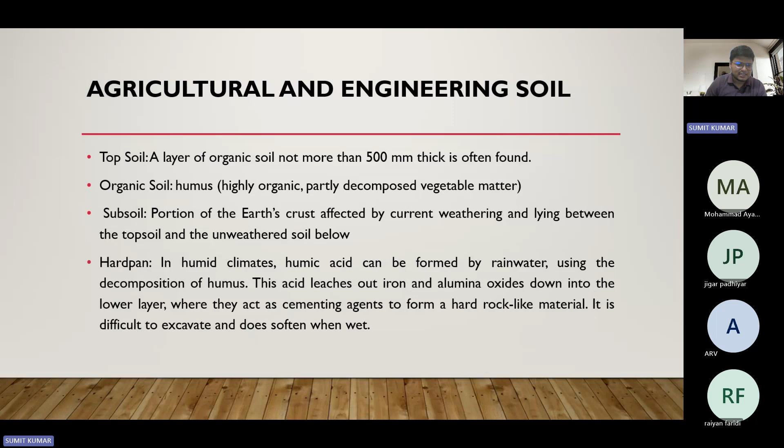Soil is basically a building block also, because the bricks used in construction also contain soil. It has been used across all construction practices.

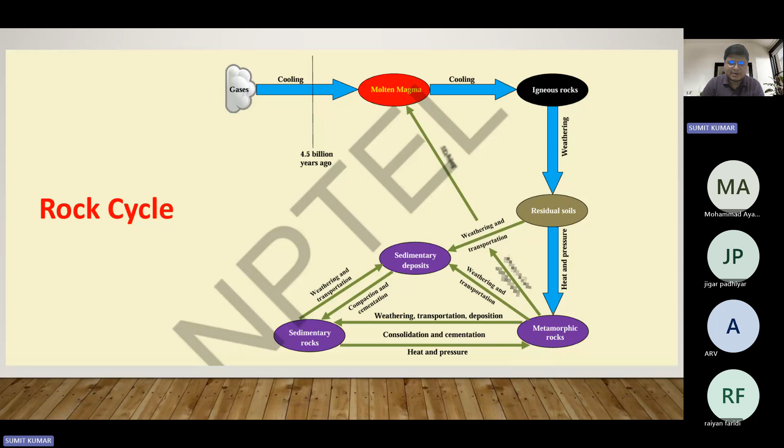We discussed the soil horizons and soil characteristics. We understood how the formation of soil takes place, and how geologists classify the earth crust as rock, whether hard or soft deposit. Afterwards we understood the rock cycle, covering igneous, residual, metamorphic, and sedimentary rock. Those contents were discussed in detail in the previous classes.

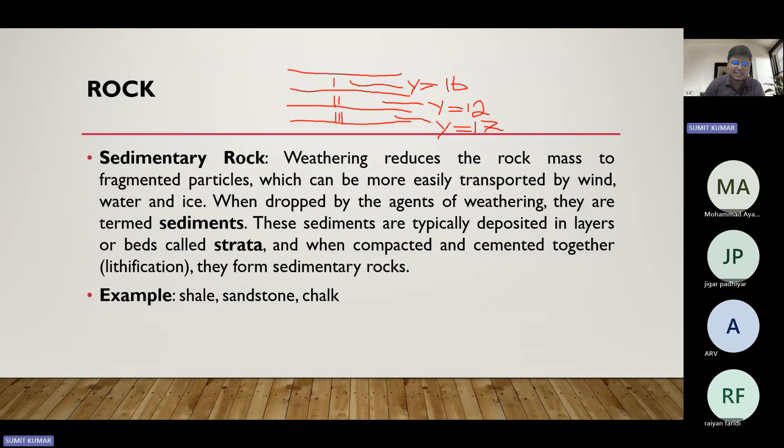I think you have that content, and the assignment problem came in this class. Examples of igneous rock are granite, gabbro, and basalt - their characteristics and how the rock gets formed, the stratified structure, and what strata means was discussed. In the figure, I gave an example about strata showing different characteristics in different layers of soil.

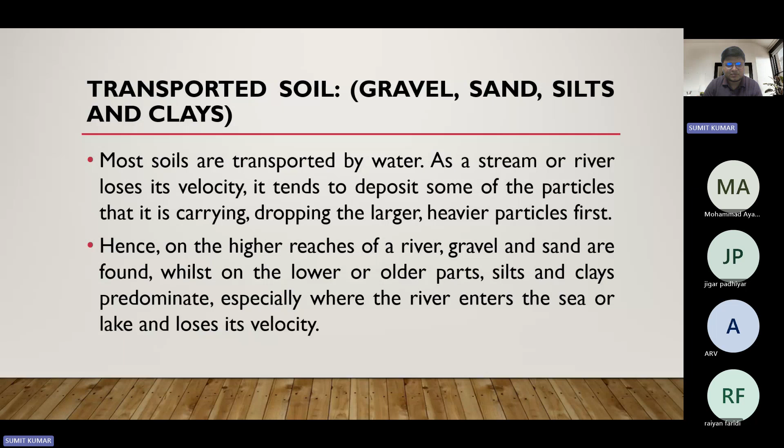We discussed how when water carries heavier rock material, like a river does, the heavier part of the soil gets deposited at the upstream side while the lighter part carries forward - that's why gravels are found in the upstream section. That was also elaborated.

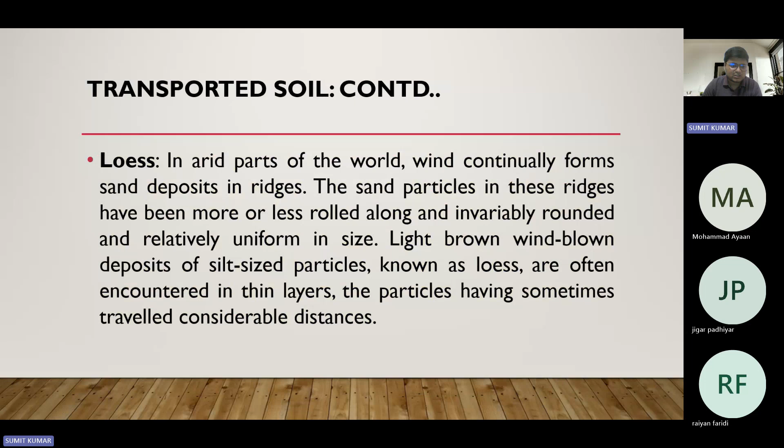Then residual soil - the deposit which resides on the parent rock only, where formation takes place over there, is residual soil. Then we discussed laterites, which are formed by the chemical weathering process.

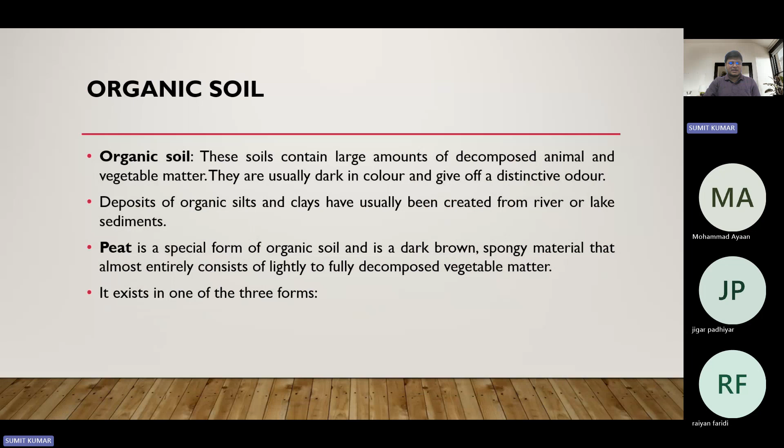At the end, organic soil like peat - the formation of organic soil through decomposition of organic matter like animal, plant, and vegetative matter - was covered. Subsequently, different organic soil components like peat, fibrous, pseudo-fibrous, and amorphous were elaborated.

Subsequently we discussed characteristics like cohesion and angle of internal friction, the two shear strength parameters which govern the characteristics of soil.

Then the difference between soil properties and other structural properties like steel and concrete was formed. With steel and concrete, we manufacture them so we have control over that, but soil is formed through a natural process, so the control is not in our hand - it is by nature only.

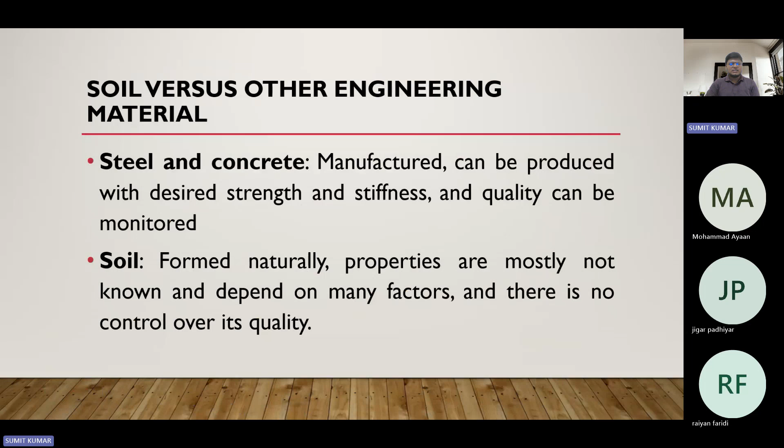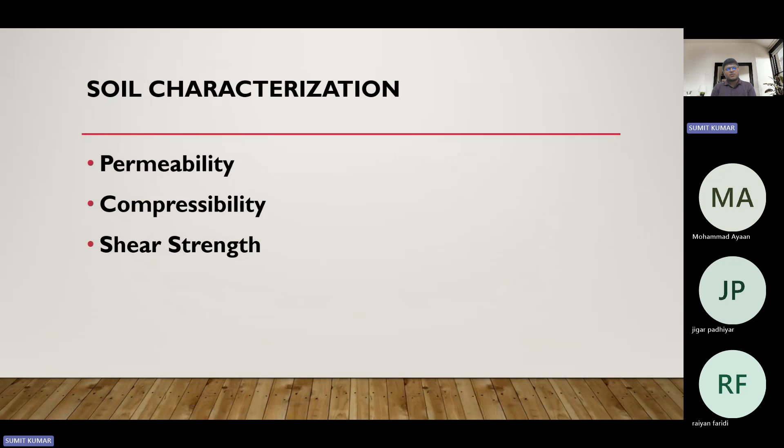Permeability, compressibility, and shear strength are some soil characterizations which we haven't elaborated on in the previous class. From today, we will discuss some properties of permeability, and compressibility and shear strength will be discussed in subsequent classes.

How we identify soil in the field - whether it is sand, silt, or clay - was elaborated in tabular form. And sieve analysis, one of the important factors for soil classification, was covered in the previous classes.

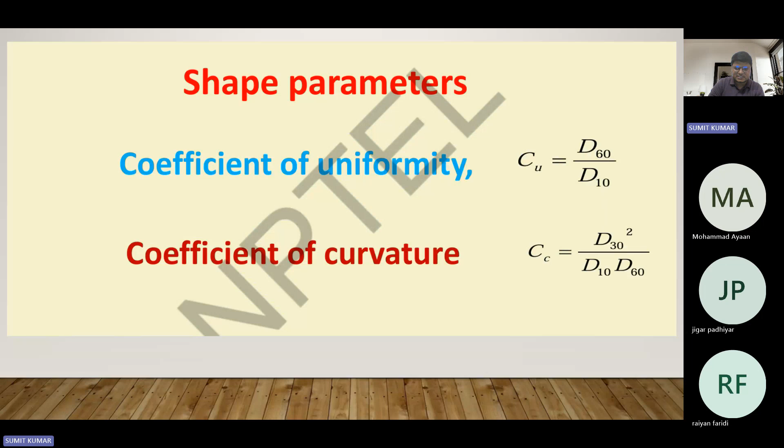Subsequently we saw the grain size distribution graph, from which we found the coefficient of uniformity and coefficient of curvature. Then we covered various Atterberg limits like the liquid limit, plastic limit, and shrinkage limit.

At the end, we saw a graph where we learned that soil first replaces air void with water void until the shrinkage limit. Once the shrinkage limit is reached, the soil is in a fully saturated condition.

Afterwards, when water gets added, the volume increases. In addition, we have understood that up to the shrinkage limit, it is in solid form. Subsequently, when the water content increases, it converts into semi-solid. Between the plastic limit and liquid limit, it is in plastic solid form. After the liquid limit, if water remains added, it converts into a viscous liquid.

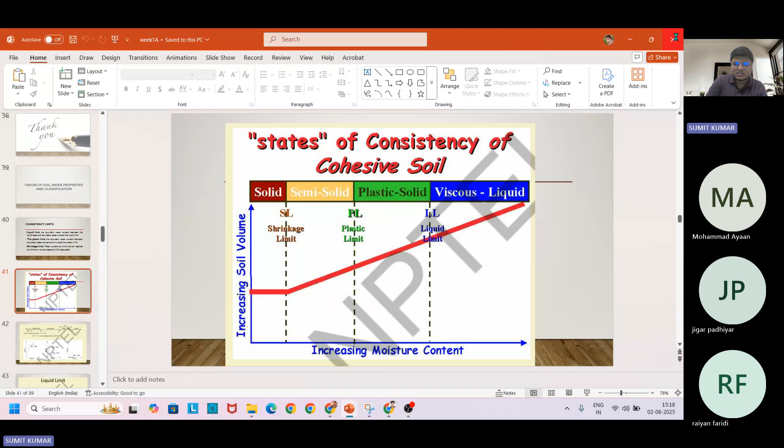Okay, so up to this we have discussed. Afterwards, some problems regarding the same have been covered in the previous class. So now I think we can move with the new content and cover the new discussions pointed out for today. Let me start today's class with the new content.

First of all, we are going to study the three-phase system, the three-phase diagram. So let's understand the basic consideration. If we talk about soil, soil looks like it is in solid form only.

If we ask a layman, a layman is a person who has no technical knowledge. Everyone has some knowledge, maybe more than us, but when we talk about no knowledge, we mean technical knowledge. They are not technical persons who understand technical terms. If you go to some places, laborers or maybe a Rajmistri might sometimes have more knowledge than professional engineers who have worked for many years.

But when we talk in technical terms, they are unable to answer. So we are the technical people. When we talk about the three-phase diagram, if we ask any person with technical understanding, we say we stand on this soil. What are the characteristics of this? Whether it is solid or liquid.

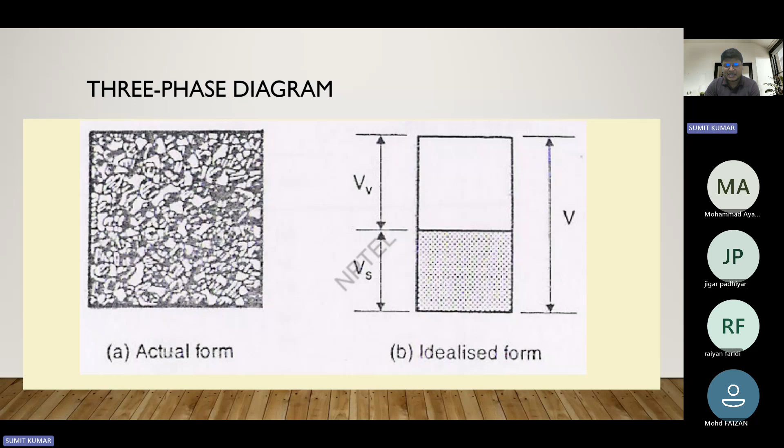Okay, over here the term void comes. So what is void? Void is the empty space in the soil volume that might be filled with water or air. A term is also explained for this, named the void ratio. Void ratio is nothing but the volume of void to the volume of solid, and its range lies from 0 to infinity.

Now there is a question: how? Okay, now let me draw one picture.

Now you see over here, there is this phase system in which we have solid and void. There might be a condition where there are no voids, only solid. If we consider this cross section only, then it is solid only. The void ratio in this volume would then have no void, volume of void we have kept upside. So there might be a condition in which no void is present. Practically it's not possible, but theoretically there may be a chance of no void. The void ratio is the volume of void by volume of solid, so since there is no volume of void, the void ratio may be 0.

Subsequently, if some void is present, then the void ratio, which is volume of void by volume of solid, becomes greater than 0 when some volume of void is there. So its value lies in the range from 0 to infinity.

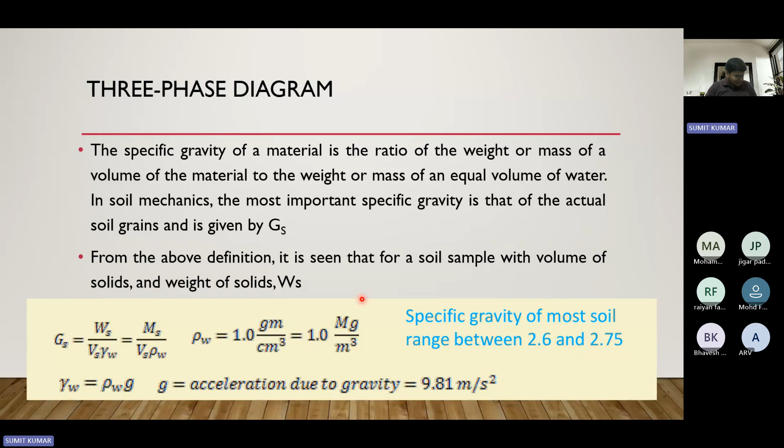And this value is 1 gram per cc, that is the density of water. When we talk about gamma W, that is the specific weight or density of water, represented by rho into G, where G is the acceleration due to gravity. We have also seen in the last class that the specific gravity of most normal soils lies in the range of 2.6 to 2.75, but for organic soils its value is sometimes found to be less as well. We will see more in that regard as we move forward.

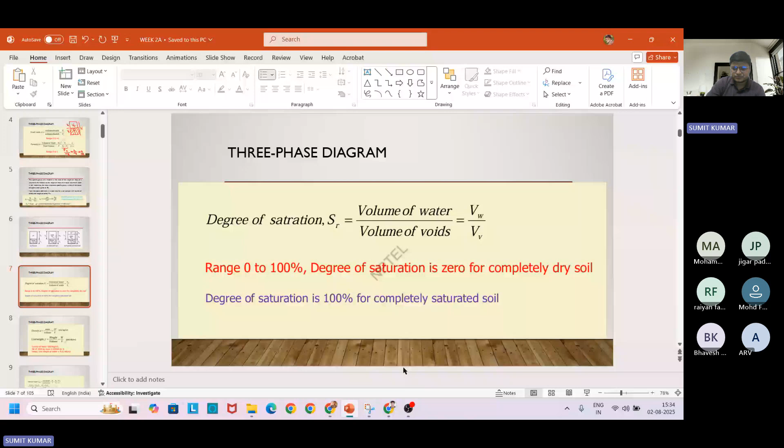Okay, so I think up to this there will be no confusion in anyone's mind. So we will move ahead. Now we move to the density. We already read weight density, that is rho into g. Over here, density is defined; density is nothing but mass per unit volume.

Now let me explain this. This thing is already known to you. No need for explanation, but just for the sake of convenience, I will explain this. This is a solid which might have a mass of m, and its volume is equal to v. If any solid or anything is present, it must have some mass and some volume, because whether it is solid, liquid, anything, it must have some mass and must occupy some volume.

So its mass divided by its volume is known as mass density, and the unit of mass is kg, gram, whatever you say, while the unit of volume is meter cube, liter, centimeter cube. So its unit becomes kg per meter cube, or maybe gram per centimeter cube, whatever is feasible, whatever CGS unit, MKS unit, SI unit you want to assume.

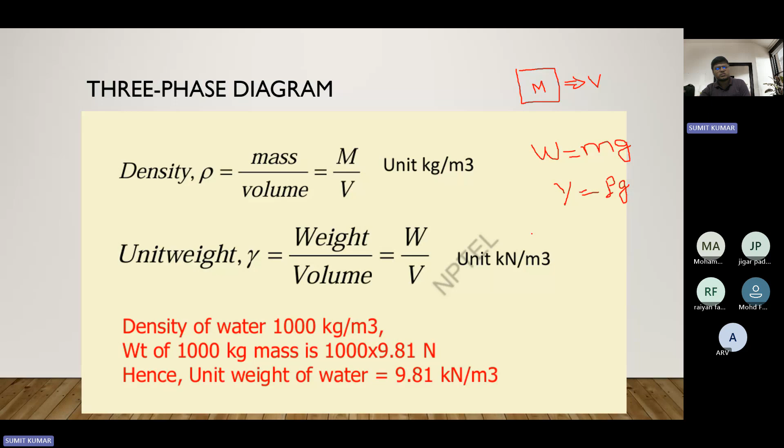So the density of water is 1000 kg per meter cube, while the weight of 1000 kg of water is 1000 into 9.81 Newton, that is 9.81 kilonewton per meter cube is the unit weight of water. Now we move to the next term, the bulk unit weight. The bulk unit weight is the weight in the given condition divided by the volume in the given condition, that is W by V.

If we talk in terms of the phase diagram, Ws is the weight of solid, Ww is the weight of water, divided by the volume of solid plus volume of void. In the three-phase diagram, you see that solid is there, water is there, and air is there. Solid has some weight, water has some weight, but air has negligible weight, so we assume weight of air as 0. So the total weight is weight of solid plus weight of water.

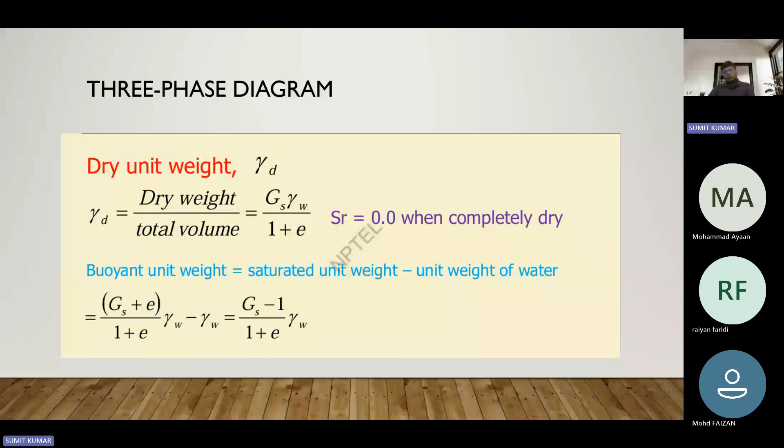Now, when we move ahead, we see the relation between W, gamma D and gamma bulk. The gamma bulk is weight of water plus weight of solid divided by volume, while in the dry condition there is only weight of solid because there is no water, so weight of solid divided by total volume. Water content W equals WW upon WS, so weight of water equals water content into Ws. So gamma bulk becomes Ws by V into 1 plus W, and gamma D becomes gamma bulk by 1 plus W.

Now we see the relation between W, GS and SR. Water content is weight of water by weight of solid. Weight of water is volume of water into gamma W, and weight of solid is volume of solid into gamma W into GS. Gamma W gets cancelled, so it becomes volume of water by volume of solid into G, and void ratio is volume of void by volume of solid. So it gets converted into SR into E upon GS.

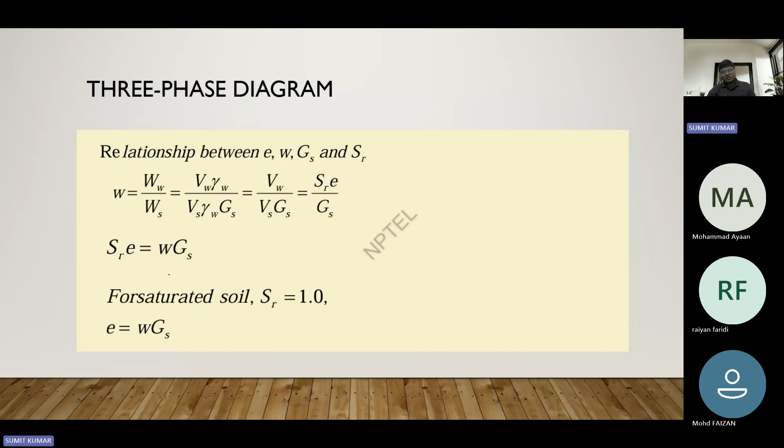Up to that we have read the degree of saturation, but there is also a term Na. There is another term AC, the air content, that is volume of air by volume of void, as degree of saturation is volume of water by volume of void. So AC plus S is equal to 1. Similarly, the percentage air voids term Na is volume of air by total volume, where volume equals volume of solid plus volume of water plus volume of air.

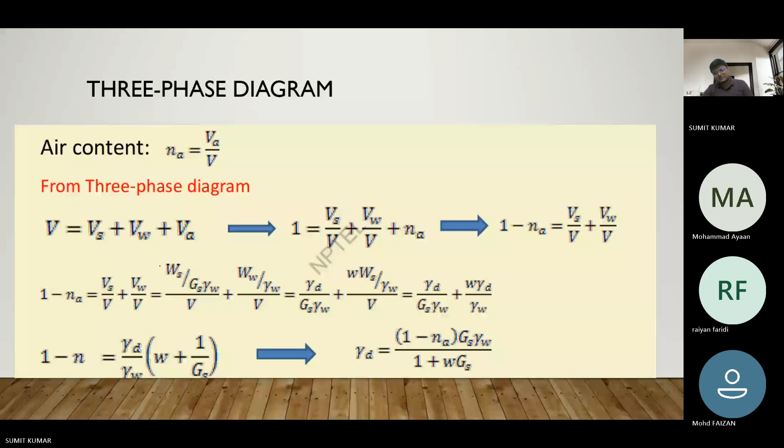When we solve it in the same fashion, we find that gamma D is also given as 1 minus Na into Gs into gamma W by 1 plus WG. So that's all for this up to here. Now we move further in the three-phase diagram with some numerical problems. At the end of the numerical problems, we are going to take a small 5-minute break so that the mind gets recovered, and then we move further.

So first of all, see this question, and I will explain it step by step. But first, all of you read it by yourself, to see what you understand from this question.

Okay, a moist soil sample weighs 346 grams. After drying at 105 degrees Celsius, it weighs 284 grams. Specific gravity of the mass and the soil solids is 1.86 and 2.7 respectively. Determine the water content, void ratio, and the degree of saturation. So the first problem is very simple. I will explain all the problems, but for similar problems like this, I suggest you take any soil mechanics book.

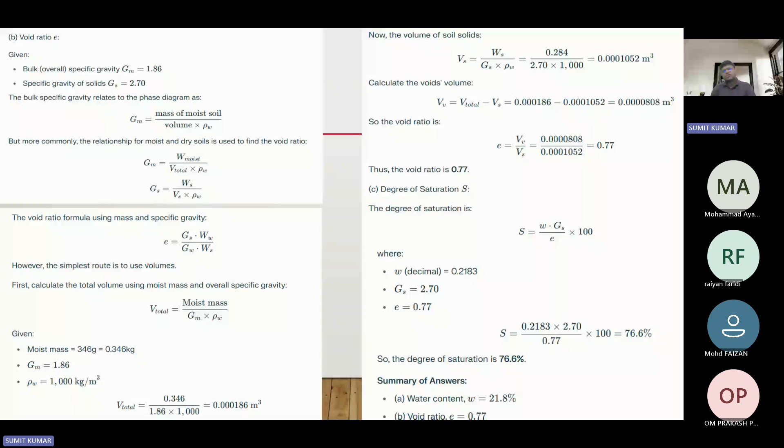And subsequently, when the void ratio is found as 0.77, the degree of saturation you can calculate easily. That is nothing but Se equal to wG. We need to calculate the S value. We already know e, that is the void ratio, and we know Gs, that is 2.7. Hence the degree of saturation comes out to be 76%. And the summary of the answer is also printed over here.

Now move to the second problem associated with this topic. A soil deposit is being considered to fill a building site. In its original state in the borrow pit, the void ratio is 0.95. Based on the laboratory test, the desired void ratio in its compacted state at the building site is to be not greater than 0.65. Determine the percentage decrease of the volume of the deposit from its original state. So, two important equations you need. What are those two equations?

One thing is that the volume of solid and weight of solid remain constant. If you take any soil, its solid content and weight of solid content never change. This is the most important thing you need to understand. Constant. Now, another relation is also there. That relation says Vs, the volume of solid, equal to Vt, this is equal to.

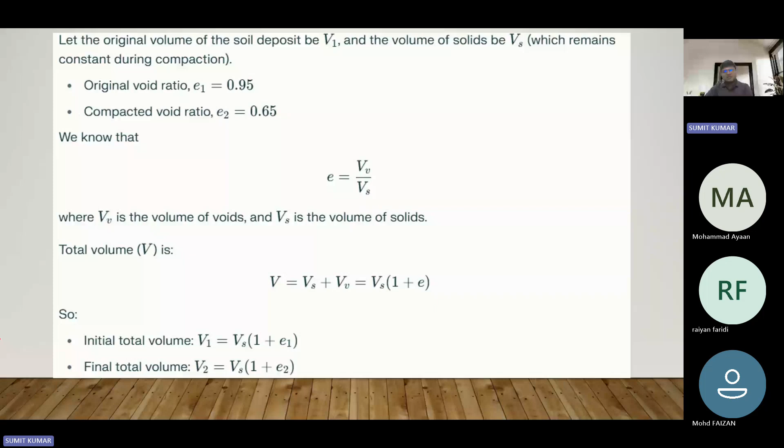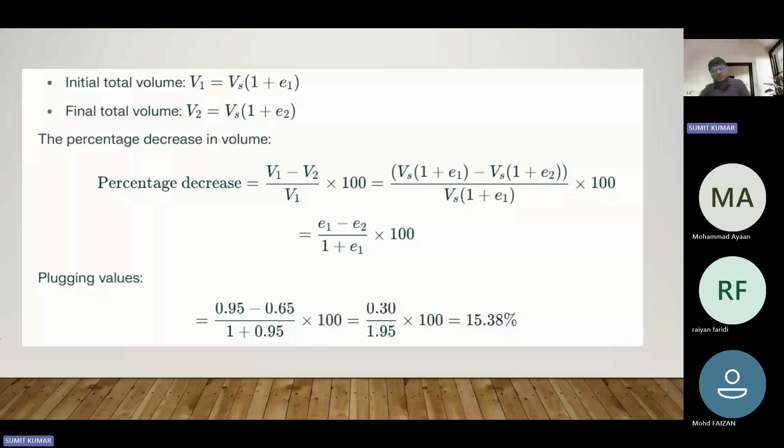As I have already said, Vs equal to Vt by 1 plus E. Here V1 is the total volume, so V1 equal to Vs into 1 plus E1, while V2 equal to Vs into 1 plus E2. Subsequently, when we calculate the percentage decrease as V1 minus V2 by V1 into 100, you find that it is E1 minus E2 by 1 plus E1 into 100, and this percentage comes to be 15.38%, and hence our problem gets solved.

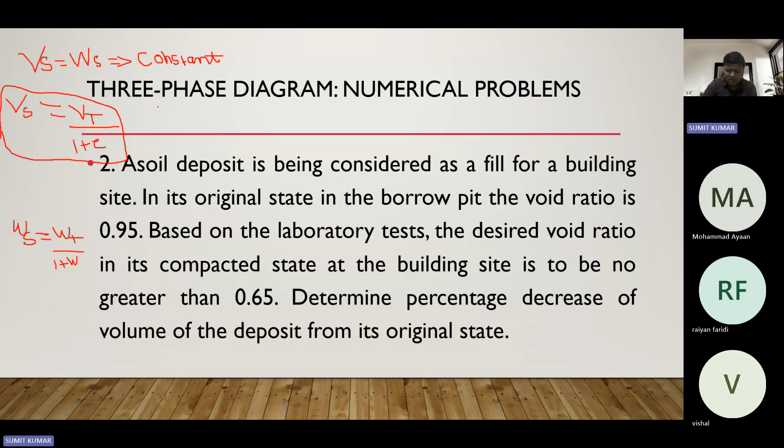Again, what relations are we going to use? We are going to use this relation only, which we have written in the previous slide. That is Vs equal to Vt by 1 plus E. This relation we are going to use, where Vs is the volume of solid, Vt is the total volume, and E is the void ratio. The void ratio is given to us. Now let's read the question.

Here the soil sample taken from the borrow pit has the in situ void ratio of 1.15. The soil is to be used for the compaction project where the total volume is 100,000 meter cube, and over there the void ratio is 0.73. So how are we going to solve it?

First of all, the soil is to be used for a compaction project where a total of this many meter cube is needed in a compacted state with the void ratio predetermined to be 0.73. So 100,000 divided by 1.73 equal to Vs, and that Vs is equal to Vt by 1 plus 1.15.

So I have said this, but maybe you haven't understood, so let's see the solutions. They have solved it in a similar fashion. Over here, given terms are E naught equal to 1.15, E1 equal to 0.73.

The volume needed at the compaction site is 100,000 meter cube. The volume to be excavated from the borrow pit is taken as V naught. Now, the total volume V is related to Vs, as I already said, Vs remains constant. So V equal to Vs into 1 plus E. Over here, V naught equal to Vs into 1 plus E naught, where V naught is the unknown, and V1 equal to Vs into 1 plus E1, where E1 is known to us, that is 0.73.

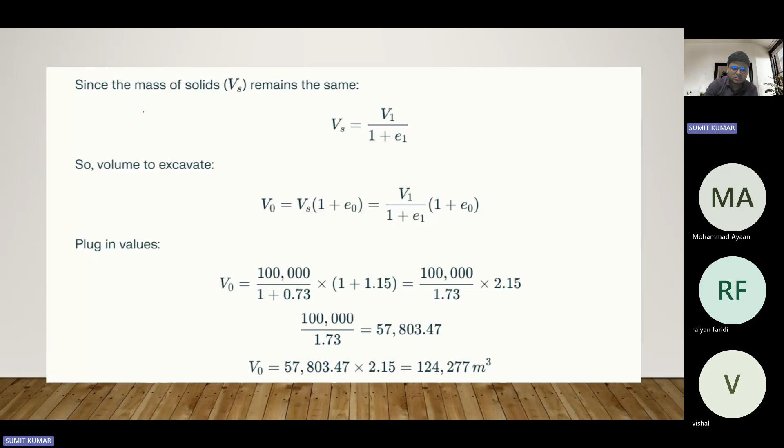So from the last two equations, using E1 value as 0.73 and V1 value as 100,000, we are able to find Vs. Once we find Vs, we put it in the above equation, and E naught is already known as 1.15, so we are able to find the volume V naught. So that's what we have done. First we calculated Vs equal to V1 by 1 plus E1, and from that we found V naught, the unknown volume required. There might be some calculation mistake, I'm not sure, but the concept more or less everyone should have understood.

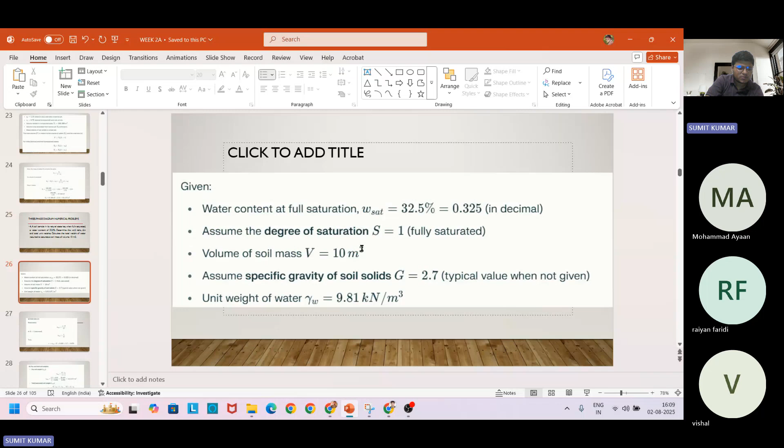Let me move to the next question. There are many problems related to the same topic. I will share the PPT with you and you could solve by yourself, or maybe I'll come to it at the end. I will solve it because I have to cover many more things. Let me discuss one more problem, then I will leave two problems for you.

Over here again the similar concept. The question is: a soil sample in its natural state, when fully saturated, has water content 32.5%. Determine the void ratio, dry and total unit weight. Calculate the total weight of water required to saturate the soil, a soil mass of volume 10 meter cube.

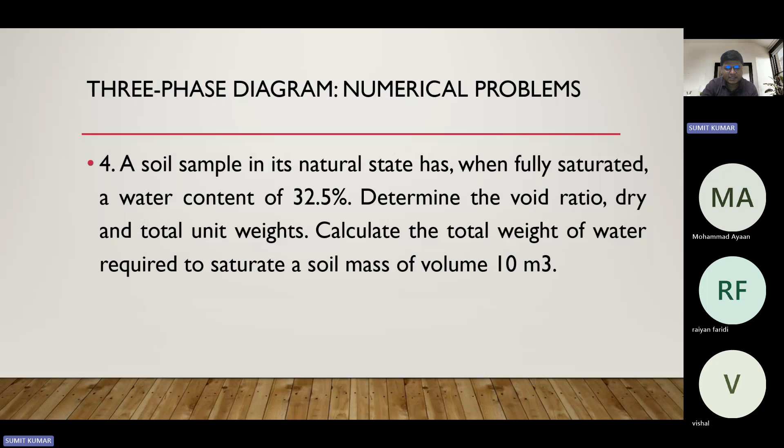So it is a simple problem. The solution I have already done over here, I will share it with you. You will easily understand because I don't think this basic thing needs to be discussed in so much detail. If required, I will discuss it in some other class, because today we have only 1 hour left and many more things to cover. So I will skip this and share the PDF.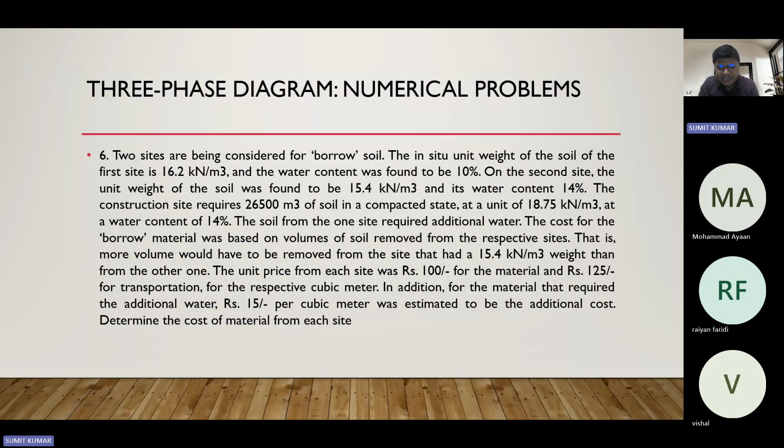So this is the homework, question number 5 and 6 you need to solve yourself. In addition, the four other problems mentioned above, you need to solve by your own hand with pen and paper so that you can easily grasp the concept. Because if someone just teaches you and discusses the problem and solutions, this is not the right way to get a better understanding of the subject. Hence, it is my sincere request that you must solve these problems by yourself.

Now I move to the next part, that is permeability and seepage. Up to this point, in the previous class we have understood the origin of soil and the three-phase diagram. Now we are moving to a new topic, permeability and seepage, because soil is permeable. When we talk about permeability, it is the ability of the soil to allow water to flow through it. So that discussion we are going to carry forward from here.

Now, first of all, when we talk about permeability, we talk about movement of water through the soil mass, so there must be water present in the soil surface. Now I start with a very basic concept: in our households we normally use hand pumps.

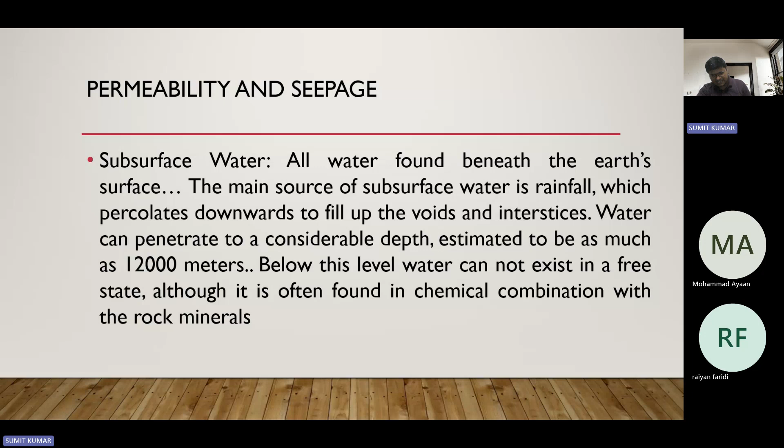Now, the subsurface can be split into distinct zones. We talk about the saturation zone, dry zone, and many more zones, which we are going to discuss here. So first of all, the subsurface can... give me a minute, please.

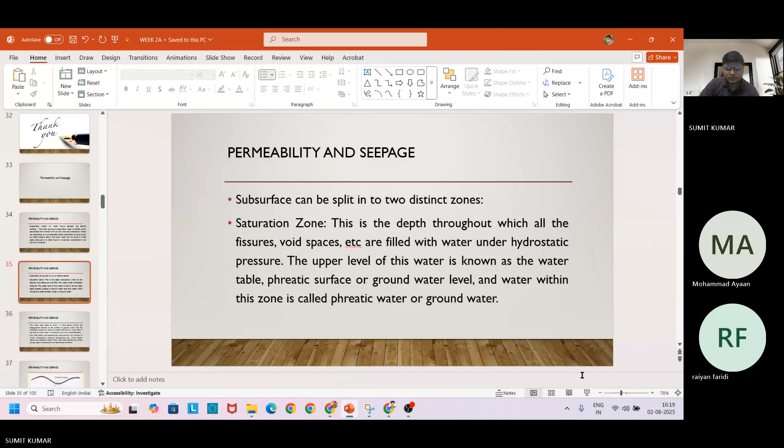Okay, so I am talking about the subsurface. The subsurface can be split into two distinct zones. First is the saturated zone. This is the depth through which all the fissures, voids, etc. are filled with water under hydrostatic pressure. The upper level of this water is known as the water table, phreatic surface, or the groundwater level. The water within this zone is called phreatic water or groundwater.

Now, the water table tends to follow in a more gentle manner the topographical features of the surface. At the groundwater level, the hydrostatic pressure is zero. So another definition of water table is the level to which water will eventually rise in an unlined borehole. The water table is not constant but rises and falls with the variation of rainfall.

As I have said earlier, specifically before the rainy season, at peak summer, the water table is found to fall below a certain level. At the same time, when the rain comes, specifically when we grow crops like rice in the kharif season, sometimes the water table is too low, so we need to irrigate the ground with boreholes or, if the facility is there, with the help of canals. So the water level fluctuates depending upon the atmospheric pressure, temperature, etc.

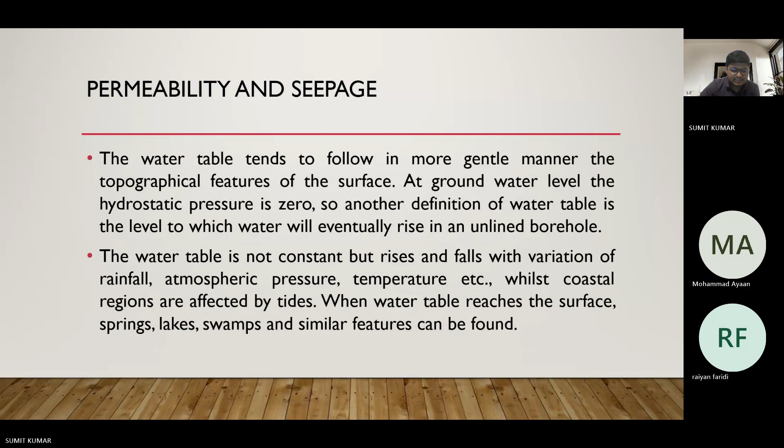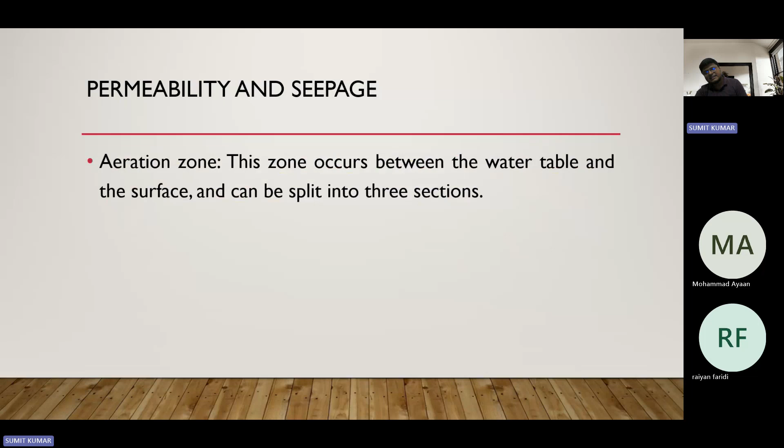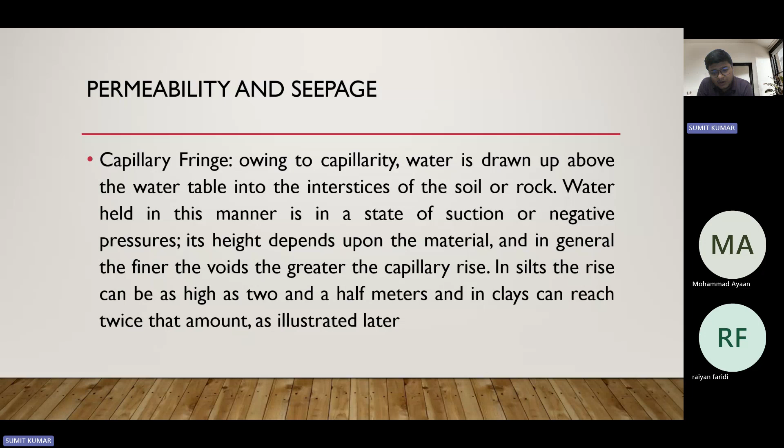Now you see the permeability. In permeability and seepage we talk about the capillary fringe. Owing to capillary action, the water is drawn up above the water table into the interstices of the soil or rock. The water held in this manner is in a state of suction or negative pressure. Its height depends upon the material, and in general, the finer the voids, the greater the capillary rise. The finer the soil particles, the more the capillary rise. In silts, the rise can be as high as 2.5 meters, and in clay it reaches twice the amount as illustrated later.

Now let's talk about the intermediate belt. Rainwater percolates down to the water table. A certain amount is held in the soil by the action of surface tension, capillarity, adsorption, chemical action, etc. The water retained in this manner is termed held water and is deep enough not to be affected by the plants.

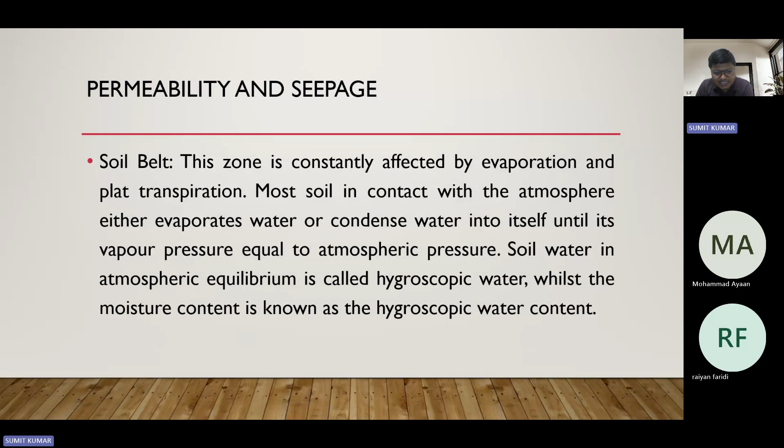Talking about the soil belt, this zone is constantly affected by evaporation and plant transpiration. The moist soil in contact with the atmosphere either evaporates water or condenses water into itself until its vapor pressure equals atmospheric pressure. The soil water in atmospheric equilibrium is called hygroscopic water, and the moisture content is known as the hygroscopic water content, which is not very huge.

Now talking about surface tension, this is a property of water that permits the surface molecules to carry a tension force. The water molecules attract each other within a mass of water and balance out at the surface. However, the molecules at the surface are only attracted inwards and towards each other, which creates surface tension. This surface tension causes the surface of the body of water to attempt to contract into the minimum area.

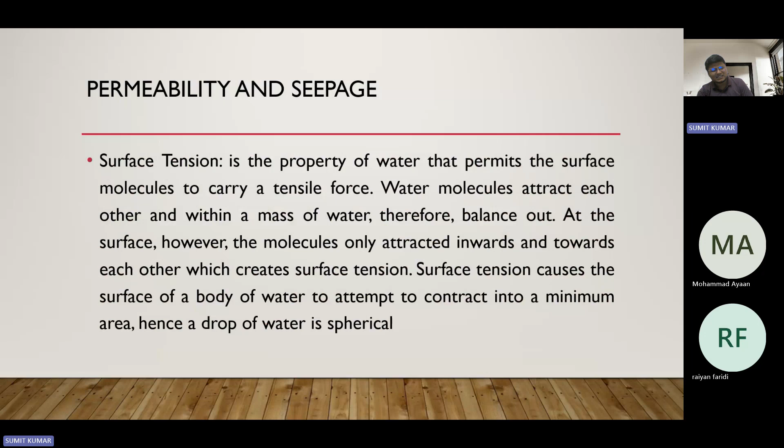Hence a drop of water is spherical. Surface tension is given the symbol T. Its value varies slightly with temperature, but the variation is small, and an average value usually taken for the surface tension of water is 0.000075 Newton per millimeter or 0.075 Newton per meter.

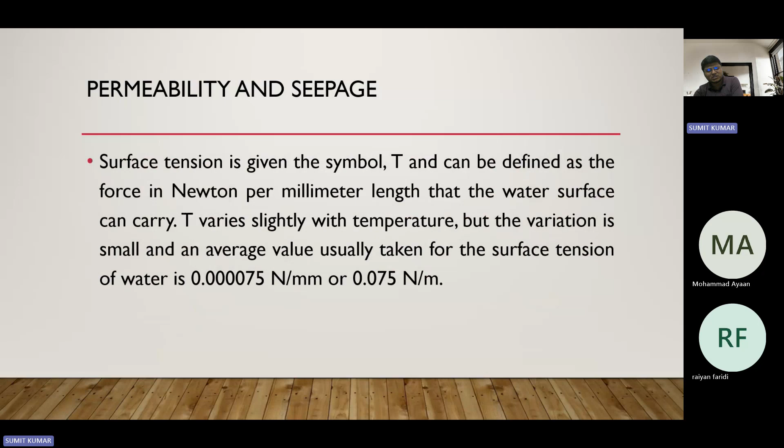Now talk about capillarity. As mentioned earlier, when we see the zone of aeration and free water zone, the capillary water is mentioned there due to capillary rise.

Talking about capillarity, the fact that surface tension exists can be shown by the familiar laboratory experiment in which an open-ended glass capillary tube is placed in a basin of water subjected to atmospheric pressure. The rise of water within the tube is then observed. It is seen that the water wets the glass and the column of water within the tube reaches a definite height above the liquid in the basin, which is said to be the capillary rise.

Moving forward, there is a question: the classification of soils with two clays, A and B, having certain properties. Which soil is more plastic, which is softer in consistency, and classify the soil as per IS classification. The liquid limits are 44 and 55. Clay A is intermediate because the liquid limit range lies between 35 to 50, with 0 to 35 being low and more than 50 being high.

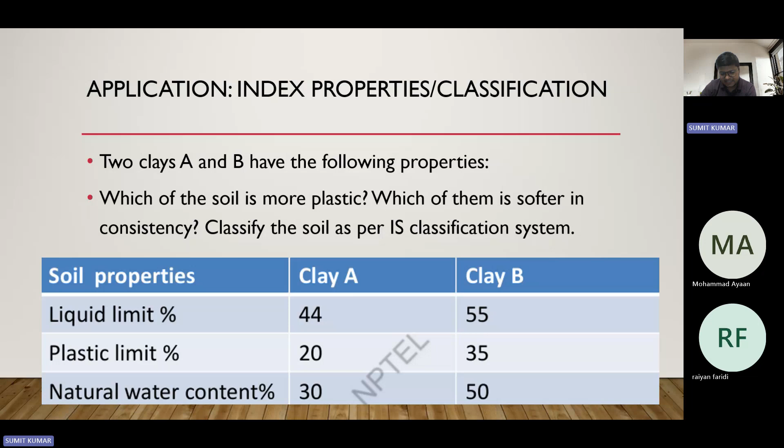So try to solve this; if not, I will cover it in subsequent classes. This was also discussed in the previous class, where we discussed consistency. Liquidity index and consistency index are two terms, and I will write the equation for the consistency index.

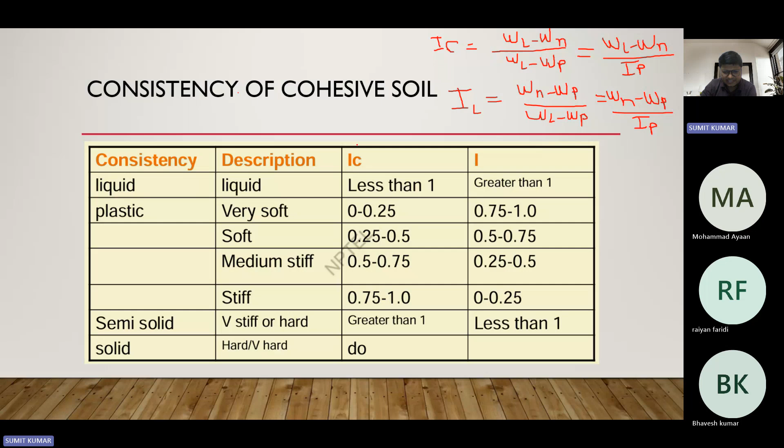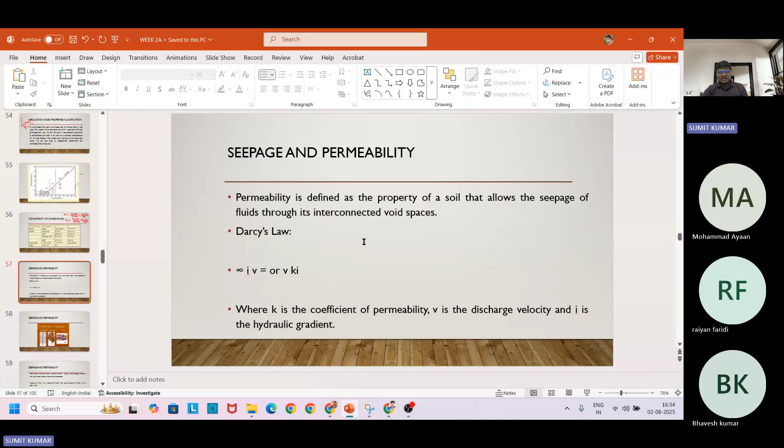Now, we move to the seepage and permeability. So, we have talked about how flow takes place, but the rate at which flow takes place also becomes very important as we move forward, because we say that the soil is permeable, and how it is permeable, how the water is present, how water flows into the soil with time, becomes equally important.

Because if we say that soil is permeable, it allows the water to flow through it. Someone will ask, okay, it will allow the water to flow through it, but how much time will it take to move the water from one point to the other?

So you see that the permeability is defined as the property of soil that allows the seepage of fluid through it, and it moves through the interconnected void spaces. So Darcy defined a condition in which he said that

Over here something is missing. I will try it with the pen.

He has explained it as V equal to Ki. Right. So velocity is equal to Ki, and subsequently discharge is equal to KiA. Okay. So where K is the coefficient of permeability, V is the discharge velocity, and i is the hydraulic gradient, that is delta H by L.

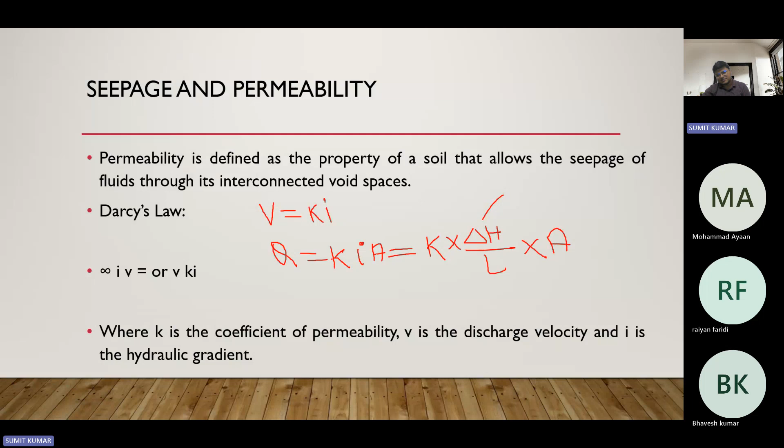Delta H is the head loss that takes place for the movement over distance L, the drop between point 1 and point 2. And K is the coefficient of permeability, V is the discharge velocity, i is the hydraulic gradient. And what is the hydraulic gradient? I have also explained over there.

Now you see, I gave this example in the very first class, in which I said that if it is a very permeable soil like gravel, it allows the water to flow through it very easily. In the granular soil also flow takes place more readily, which is nothing but gravel and sand. But for the bulky soil, it takes place in this manner. But for the platy, the clay or the silt, it is very difficult to carry the flow through them, and that's why it becomes very important.

Now, the total head is the combination of elevation head plus pressure head plus velocity head. But in soil mechanics, the velocity head is negligible. Hence, we neglect that term and we talk about only the elevation head and the pressure head. And it is already written over here as well that the seepage velocity is very less.

Hence, the velocity head can be neglected, and the head at A equals Z at A plus h at A. Okay, there is maybe a picture there. Something got missed out. That's why this content that has been written is not explained over here. But let me see.

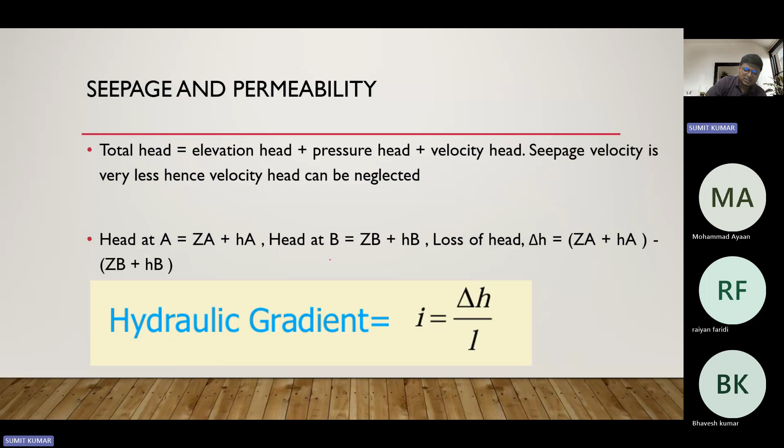Right. Now you can see that when we are going to calculate the permeability, we see how much time it will take for the movement from point A to point B, and the time taken is given by L by T, that is equal to V, that is equal to Ki, and i is already known, so the K value gets calculated. Right.

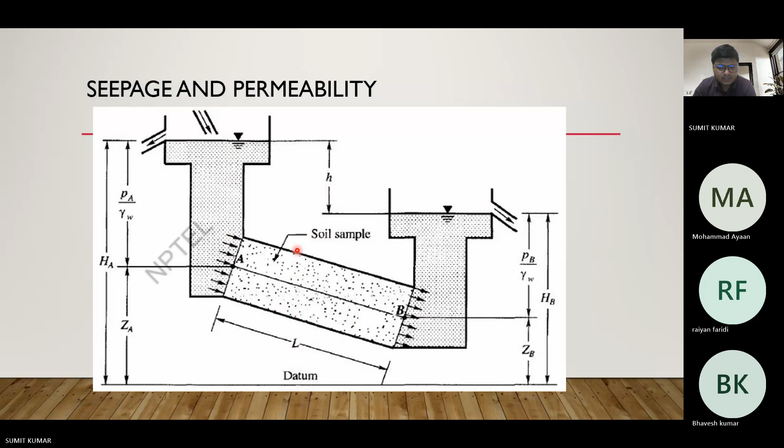Now we have some empirical and other relations through which we calculate the permeability of soil. One such relation is given by Hazen, 1892, who studied this for clean sand. There he explained K as 100 D10 squared, in mm per second, but it is an empirical relation. The D10 value must be in mm. Okay, sorry.

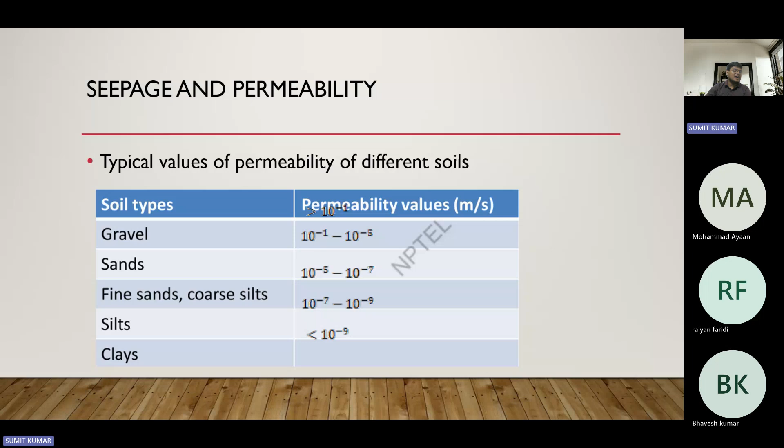Okay, so now here you see the permeability values for the different types of soil are given. The table is a little bit tilted. The permeability for gravel is greater than 10 to the power minus 1 meter per second, while for sand it lies in the range of 10 to the power minus 1 to 10 to the power minus 5. And subsequently for the next soil it lies in the range of 10 to the power minus 5 to 10 to the power minus 7 meter per second, while for fine silt and clay it goes on decreasing as we move ahead.

Okay. Now we move to the factors that affect the permeability of soil. So there must be some factors which influence the permeability. Let me see. Okay, so now we are going to move to the factors that influence the permeability of soil. Some of those factors are the shape and size of soil particles. Another one is the void ratio.

The permeability increases with the increase in the void ratio. If the volume of voids is more, the flow of water through the voids is more. Hence, the permeability gets increased. But another question also gets asked: how does the permeability of soil get reduced? So if there is high effective pressure, or high compaction takes place, the permeability gets affected.

The other thing which influences the permeability is the degree of saturation. Permeability increases with increase in the degree of saturation. Subsequently, talking about the composition of soil particles: for sand and silt, this is not important. However, for clay minerals, this is one of the most important factors. The permeability in this case depends on the thickness of the water held to the soil particles, which is a function of cation exchange capacity, valence of the cations, etc. Other factors remaining the same, the coefficient of permeability decreases with increasing thickness of the diffuse double layer.

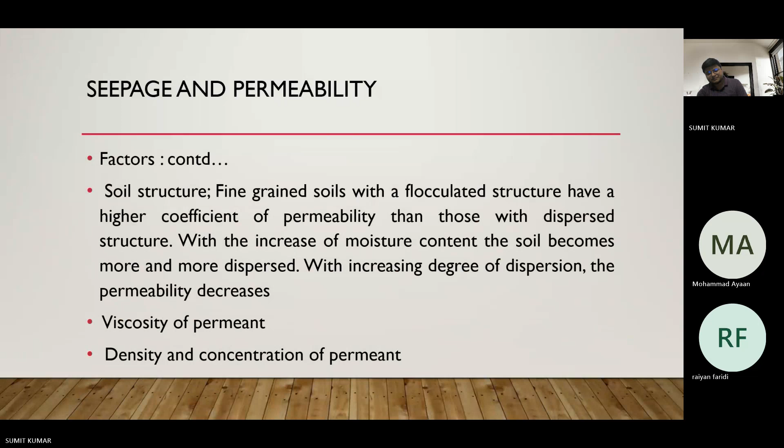Now we talk about the determination of permeability of soil. So how do we calculate the permeability of soil? There must be some lab methods, and there might be some field methods. Talking about the laboratory methods, the first one is the falling head method.

This is very good for fine grained soil. The other is the constant head method, good for coarse grained soil. The constant head method is nothing but Darcy's law itself. In the constant head method, the equation used to calculate the discharge or K is Q equal to KIA,

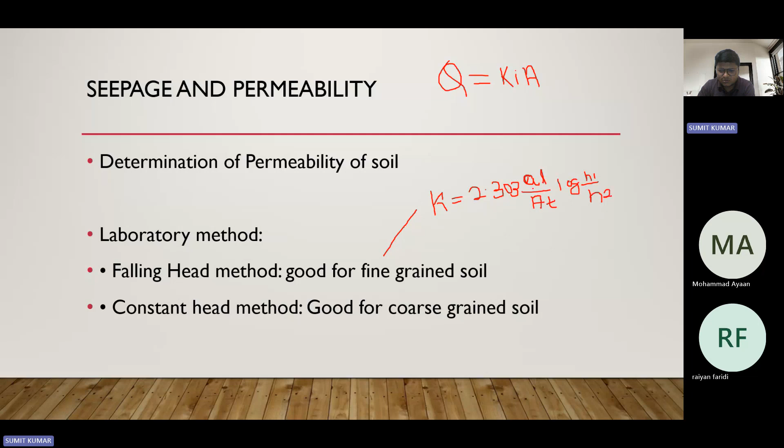where 2.303 aL by AT, where A is the area. We will see once it comes. The constant head method is good for coarse grained soil, while the falling head method is good for fine grained soil. Now talking about the field methods: one is the pumping in test, second is the pumping out test, third is the packer test, and fourth is the borehole test.

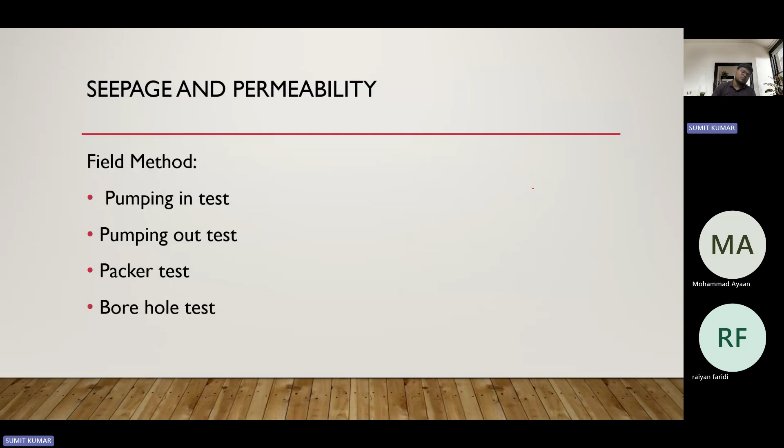Some figures are also presented to show the same. Over here, Q equal to KIA, where I is delta H by L, which we have discussed earlier as well. Subsequently, from Darcy's law, Q equal to KIA, hence the quantity of flow q equal to Q upon T,

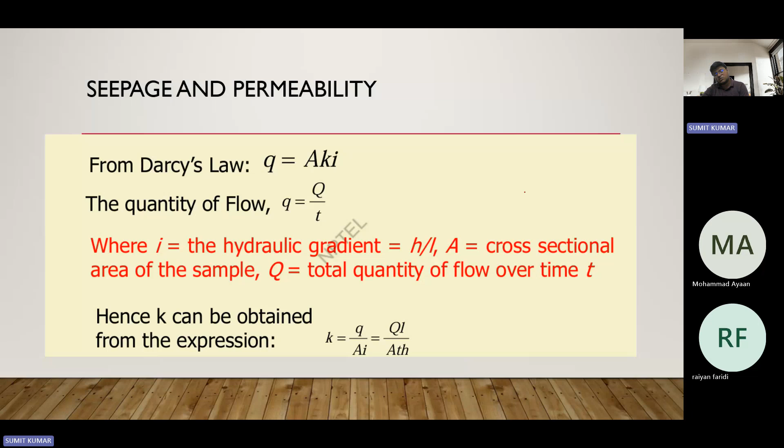where I is the hydraulic gradient, which is also written as H by L. A is the cross section area of the sample. Q is the total quantity of water flow over the time T. Hence, K can be obtained as q by IA. I already mentioned Q equal to KIA is used to calculate the K value, which has been used over here. Now move to the falling head test. This is the thing.

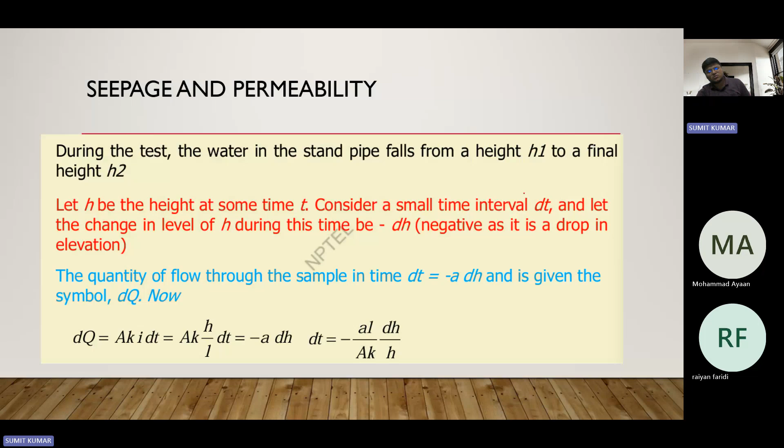During this test, the water in the stand pipe falls from height h1 to the final height h2. Let h be the height at some time t. Considering the small interval dt, the net change in the level of h during this time is dh, which is negative as it drops in elevation. The quantity of flow through the sample in time dt is equal to minus a dh and is given by symbol dq.

When we solve it, we find k equal to aL by AT ln h1 by h2, which I have written earlier as k equal to 2.303 aL upon AT log h1 by h2. Here, A is the cross-section area of the sample, small a is the cross-section area of the standpipe, L is the length of the sample, and the time over which the head dropped from H1 to H2 is the time T.

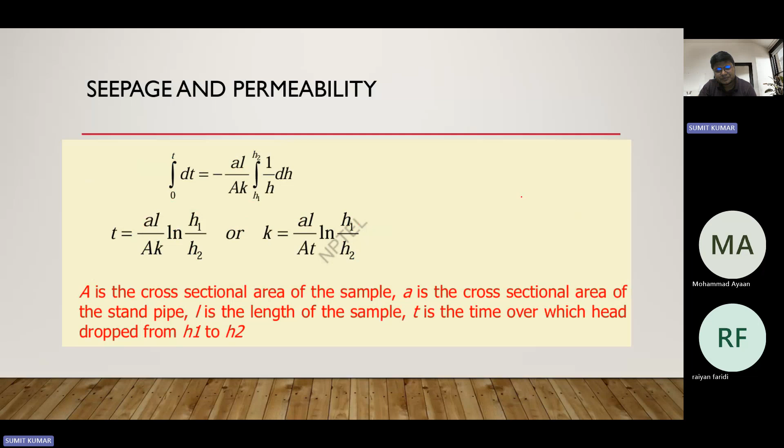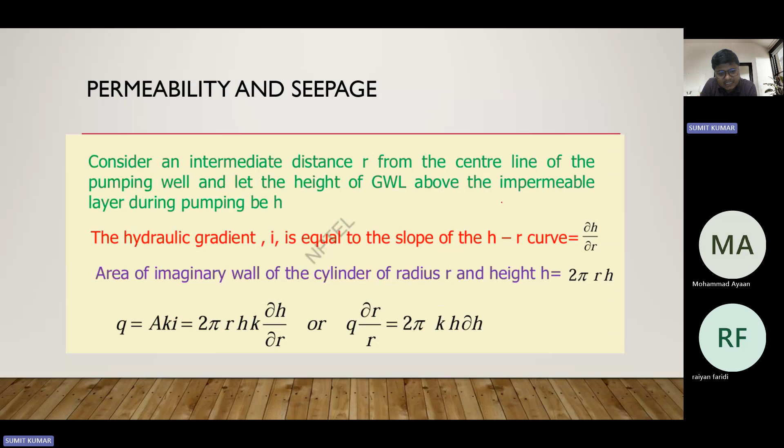The hydraulic gradient I is equal to the slope of the H-R curve, that is delta H by delta R, and the area is of the imaginary wall of the cylinder of radius R and height H. So when we write the equation and derive, we are able to find K equal to Q into log R2 by R1 by pi (H2 square minus H1 square) for the unconfined aquifer.

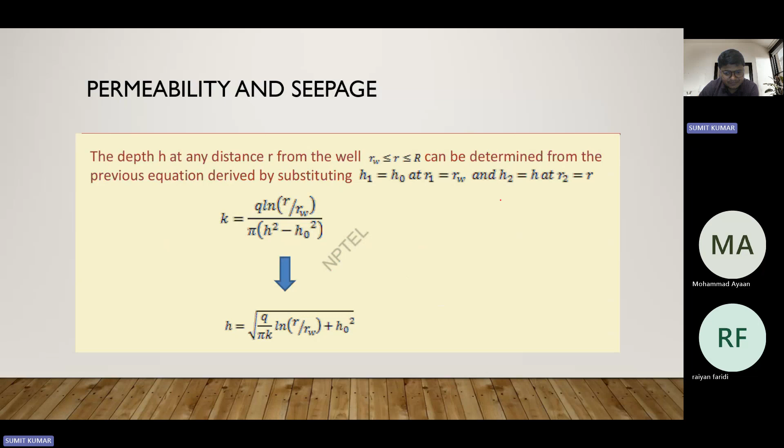And the depth H at any distance R from the well, RW to R, can be determined from the previous equations derived by substituting H1 equal to H naught at R1 equal to RW and H2 equal to H at R2 equal to R. Now K could be written here as Q into ln R upon RW, because here the two distances have been established, divided by pi into (h square minus h naught square). Similarly, by solving, the h value could be calculated from the following equation mentioned in this slide.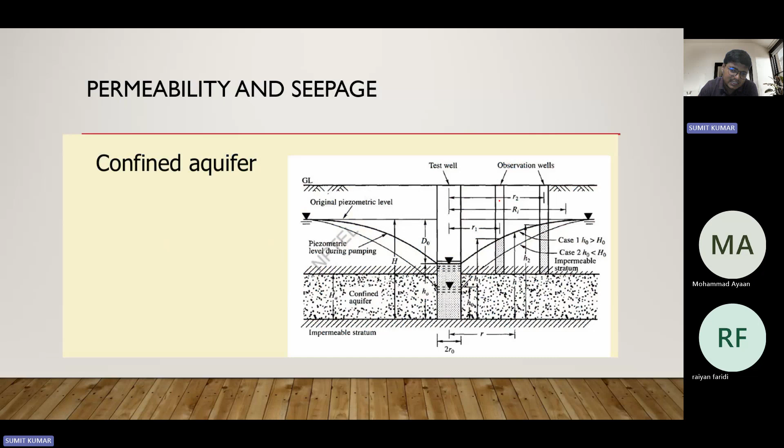Now, we talk about the confined aquifer. As we have already said, the confined aquifer is that layer in which the water is trapped between two impermeable layers, which needs to be brought out for use for different purposes. So the permeability must be there as well. Again, when we derive here, the equation comes to be Q into ln R2 upon R1 by 2 pi H into (h2 minus h1), where H is the thickness of the confined aquifer layer.

Subsequently, it is important to note that a sedimentary deposit may consist of several different soils, and it is often necessary to determine the average values of permeability in two directions, one parallel to the bedding planes and the other at right angles to them. Let there be n layers of thickness H1, H2. Now we are going to calculate the permeability for the parallel layer and for the perpendicular layer. So the thickness of each layer has been given as H1, H2, H3 and Hn,

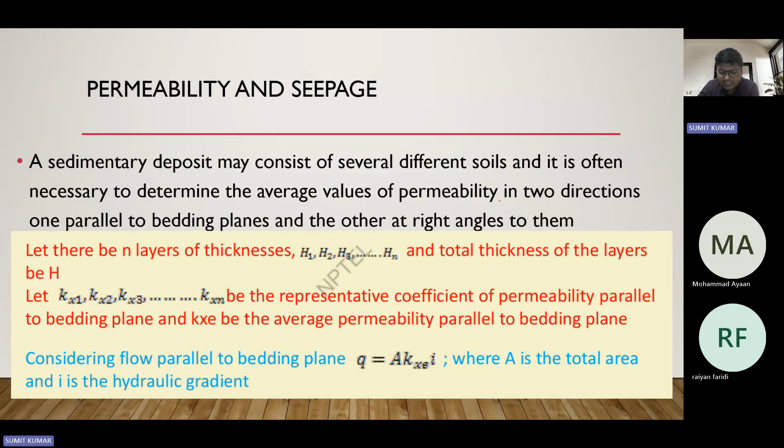and the total thickness of layer be H. So let Kx1, Kx2, Kx3 and Kxn be the coefficients of permeability parallel to the bedding plane, and Kxe be the average permeability parallel to the bedding plane. Hence, considering the flow parallel to the bedding plane, Q is written as A into Kxe into I, where A is the total area and I is the hydraulic gradient. Now, the total flow must be equal to the sum of the flow through each layer. Therefore, Kxe is nothing but summation of KH divided by summation of H.

When the flow takes place in the perpendicular direction, this equation gets converted to summation of H upon summation of Hi by Ki. Considering flow perpendicular to the plane, with kz1, kz2, kz3 and kzn representing the permeability perpendicular to the bedding plane in the respective layers, the total flow Q is given as A kz1 I1 equal to A kz2 I2, because discharge remains constant when we flow in the perpendicular direction.

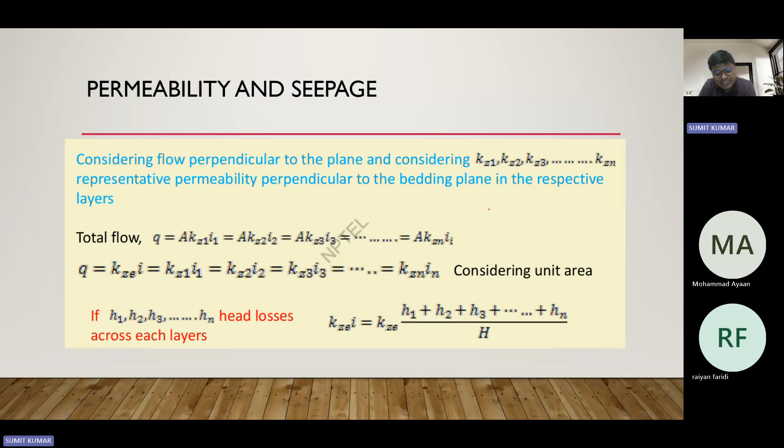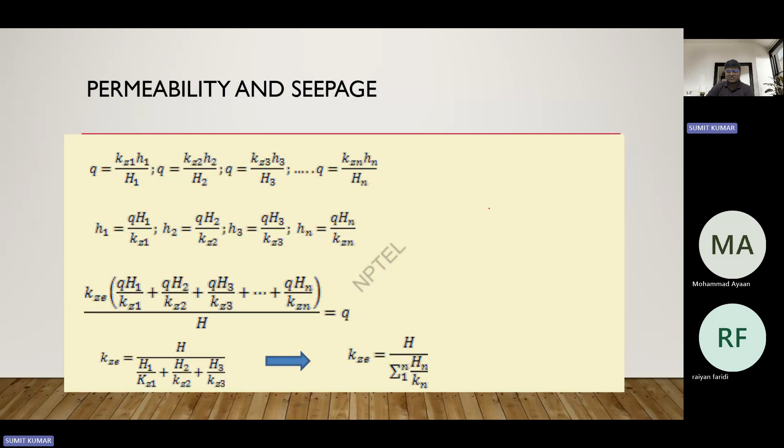So h1, h2, h3 are the head losses. So KZE is written with h1 plus h2 plus h3 plus dot dot dot hn upon H. Subsequently, the final equation comes like this: KZE, that is in the perpendicular direction, is H upon summation of Hn by Kn. With this, today's session gets concluded.

Okay, here over C. Now next problem says which of the following statements is true for fully saturated soil? Option A says that the voids are filled with only air, wrong. Voids are filled with only water, right. Voids are partially filled with water, that would be partially saturated, no. And no water exists in the sample, so option B is the correct answer.

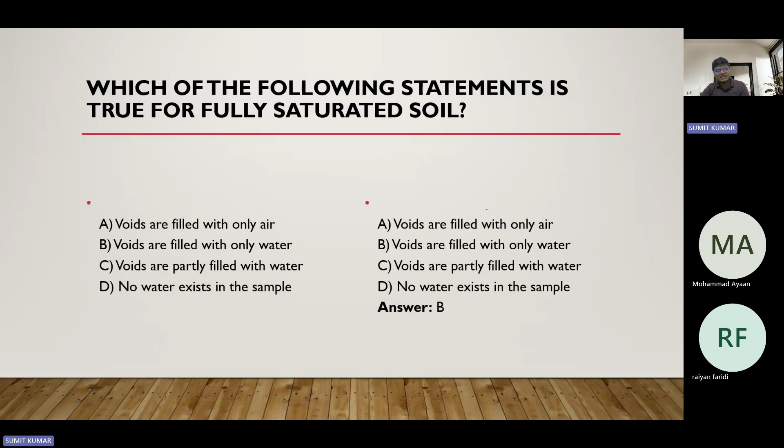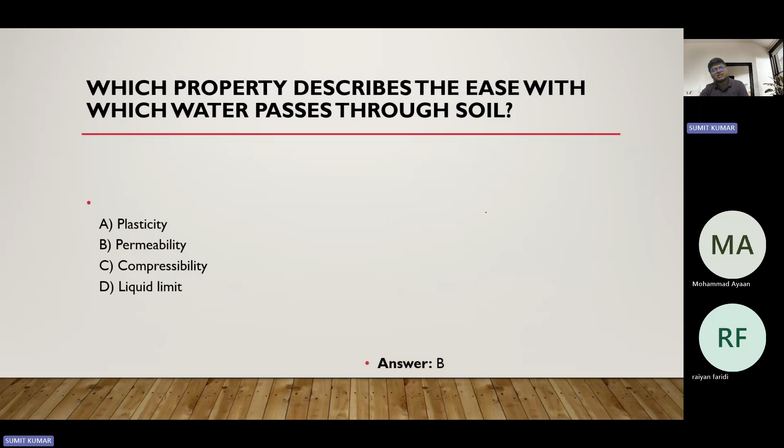Right. Now, next is which property describes the ease with which the water passes through the soil. So plasticity, no. Permeability, right. Compressibility, no. Liquid limit, no. So option B is the correct answer, right. Next question asks the coefficient of permeability is often measured in, okay. So coefficient of permeability K is measured in meter per second, as I remember. So option B is the correct answer.

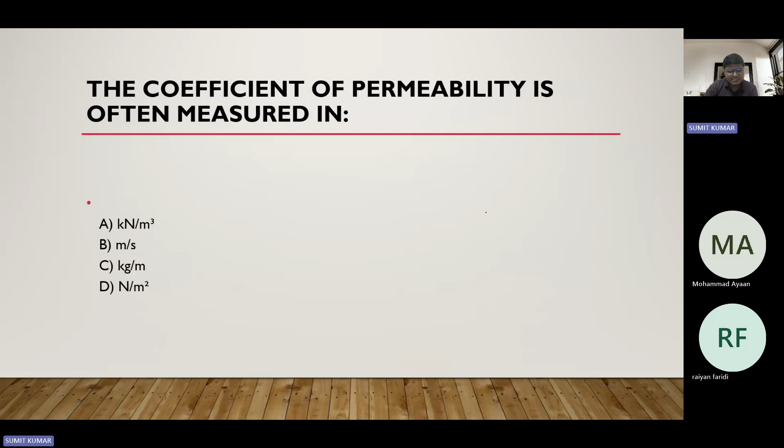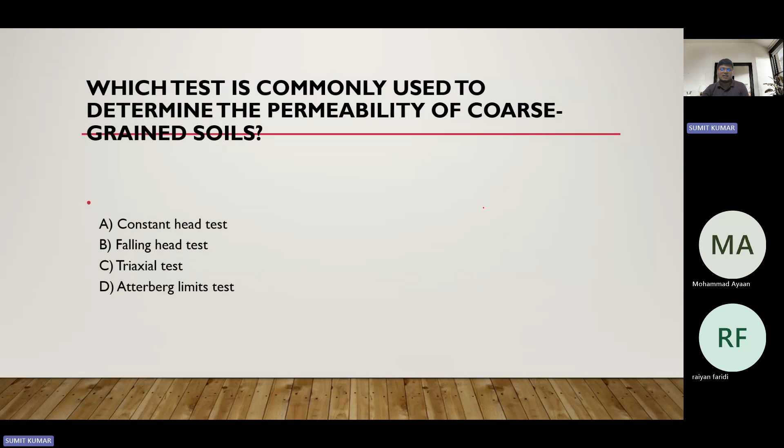Next is which test is commonly used to determine the permeability of coarse grain soil? It is already said that for the coarse grain soil, the constant head test, falling head test for the fine grain soil. So option number A is the correct answer. And then the next question is the property that measures soil ability to allow the passage of fluid is called porosity, no, strength, no, permeability, yes, compressibility, no. So option number C is the correct answer.

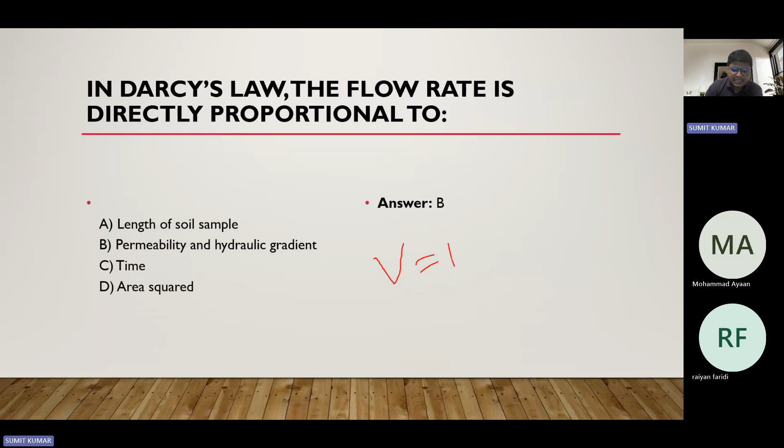Next, in Darcy's law, the flow rate is directly proportional to. So what is V equal to? Sorry, the options already came. So the permeability and hydraulic gradient. Why? Because V is equal to Ki. So it is directly proportional to permeability as well as hydraulic gradient i. Right.

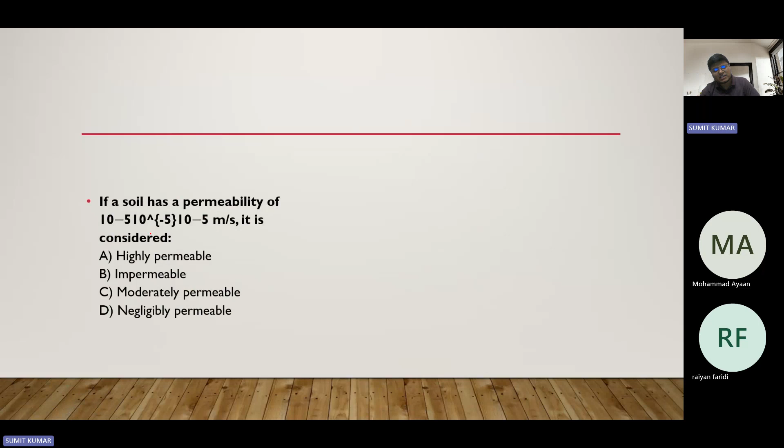Next question says Darcy's law ceases to be valid when the soil is dry, flow is turbulent, flow is laminar, soil is coarse. So option number B, flow is turbulent. Let's say that if the soil has a permeability of this, it is considered to be. I have written the permeability range as well for the different soil characteristics. If you remember this, you can easily answer this. Option number C is the correct answer for this problem.

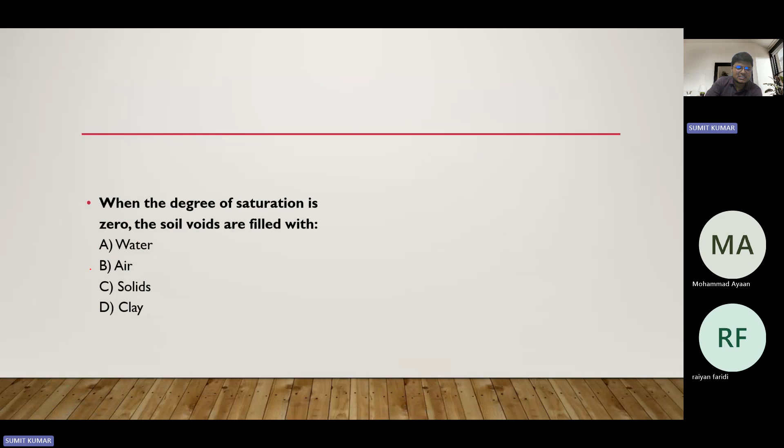Next is the effective stress in the soil is calculated as total stress minus pore water pressure. We have not read it today, so if you are not able to answer this, that's not a problem. The effective stress of soil is calculated as total stress minus pore water pressure. So option A is the correct answer. When the degree of saturation is 0, the soil voids are filled with. Degree of saturation is 0, hence volume of water is 0, so it is filled with air only. Option number B is the correct answer.